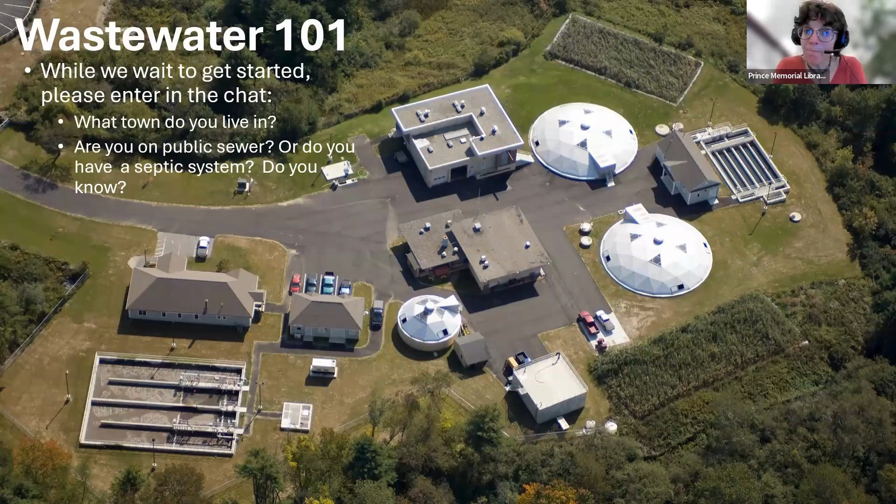And it's my pleasure to introduce to you Dan Marks. He is the Wastewater Superintendent for the town of Falmouth. Prior to working for Falmouth, Dan worked for 12 years as an engineering consultant for wastewater utilities around New England, helping to design and construct wastewater infrastructure around the region.

Dan lives in North Yarmouth with his family, and we just want to make a note here that if you're coming to us from Cumberland, Cumberland's sewered areas are pumped to Falmouth for ultimate treatment as well. So that's an important distinction to make because maybe people in Cumberland are wondering, why are we listening to the Falmouth guy? And that's why.

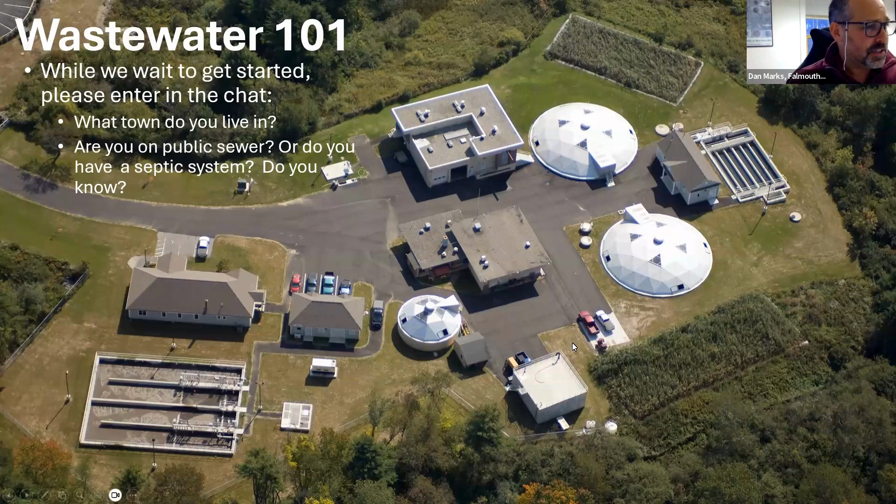As Kelly mentioned, my name is Dan Marks. I am the superintendent of the wastewater department in the town of Falmouth. And as was mentioned, we treat wastewater generated in the sewered portions of Cumberland and Falmouth. And we also receive septage from the unsewered areas of the towns. And I love talking about wastewater. And I know that makes me a little weird.

So I thought I would start by telling you why I wanted to give this talk and hopefully get you excited about it too. Most of us do not think about what happens after we flush or after water goes down the drain. And this is what we call flush it and forget it. This paradigm evolved over many generations and centuries, and for good reason. So I want to start by going way, way back for some context setting.

Before we knew about microscopic pathogens and their presence in our waste, people were getting very sick and dying from all kinds of nasty things. Cholera, dysentery, typhoid. Chamber pots were emptied into the streets and gutters. Enter the toilet. I am biased, but probably one of the greatest public health interventions of the last millennia. Deep pits, and then later on piping networks, separated us from our waste and saved an uncountable number of lives.

This will not be the focus of my talk tonight, but it is worth noting that according to the World Health Organization, over 1.5 billion people still today do not have access to basic safe sanitation services. So our flush it and forget it mentality has evolved over a long history. Yet we are in a new time where this mantra is not serving us anymore. Not the least of which is that the modern toilet literally flushes away clean drinking quality water.

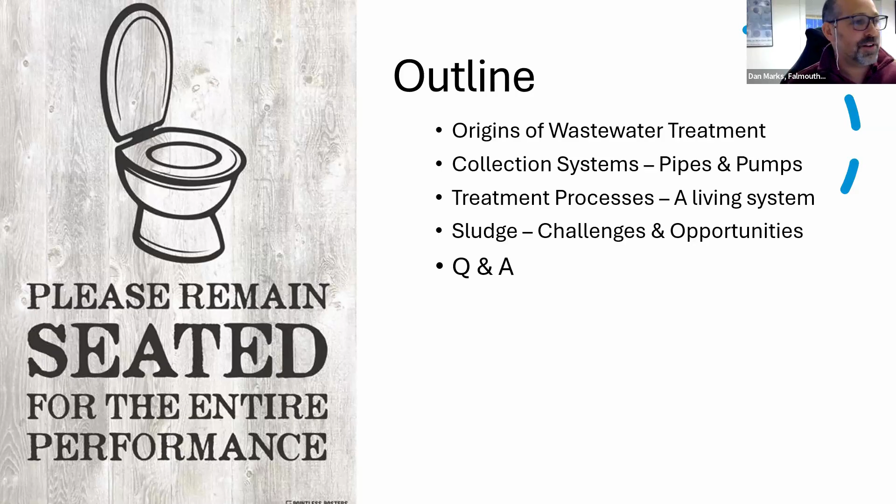So let's get started with a little interaction. I find that everyone has a relationship with wastewater, whether you know it or want to admit it. So no pressure, the stakes are low, but here's a pop quiz. So we can enter into the chat. How many gallons of wastewater do you think the average person produces in a single day? Think about all the water you use that goes down the drain. How much water would you say you use in a day? Type in either A for 25 gallons, B for 40 gallons, C for 50 gallons, or D for 70 gallons.

What do you think is the average? Wow, we're way all over the board here. D plus, I like Pat, okay. I don't know if that's like a good grade or a bad grade. Okay, great. I love the participation here. Give another couple seconds here if anybody else wants to add.

Yeah, okay. Kelly mentioned I come from an engineering background, so designing systems was part of my background. And typical design guidance for a new collection system uses 70 gallons per day per person as a minimum. Some sources suggest even using 80 or even 100 gallons per day per person. So think about how much water that we have to plan for at the treatment plant based on the number of users we have. In Falmouth, our average daily flow at the treatment plant is around 800,000 gallons per day. And between Cumberland and Falmouth, we have around 3,500 sewer connections serving almost 9,000 people. This makes about 90 gallons per person per day in Falmouth.

Collection systems also need to be designed for infiltration. So that 800,000 gallons per day at the treatment plant includes infiltration, which is basically the groundwater and stormwater that enters the sanitary sewer system. Infiltration increases as the system ages, and this is why maintaining the collection system and performing strategic capital improvements is critical. Thank you all for participating in the first pop quiz here.

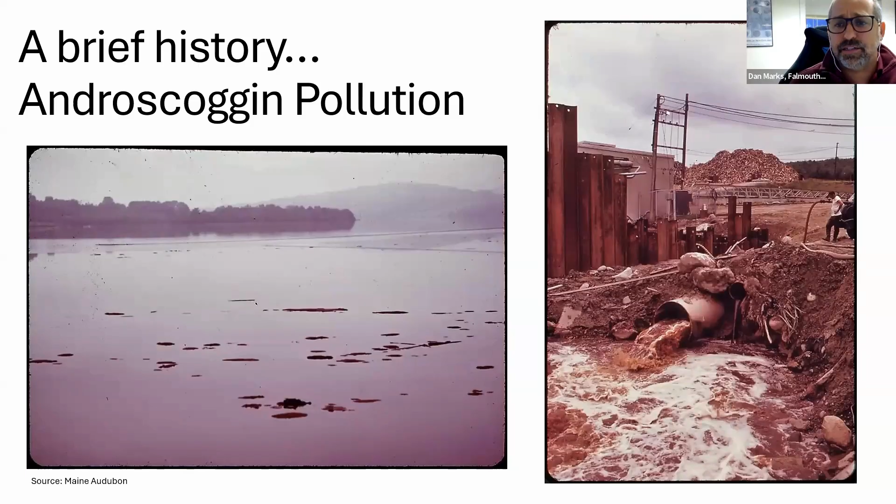Organic pollution fed microscopic life that decomposed, and in doing so, consumed all the dissolved oxygen, leaving nothing left for aquatic life and creating a dead zone. People who remember that time and talk about the Presumpscot River talk about the river being a caramel color with huge amounts of foam and smelling horrible.

So enter Edmund Muskie, who spearheaded drafting the passage of the Clean Water Act. He's famously from Rumford on the Androscoggin. The first Federal Water Pollution Control Act was written in 1948, but it took its current form in 1972 with amendments that came to be known as the Clean Water Act. So what changed with the Clean Water Act?

First, lots of money from the federal government, up to 90 cents on the dollar funded from federal grants to build infrastructure, piping networks, and treatment plants. So that's the 50 years ago, and most of this infrastructure is now 50-plus years old. In Falmouth, sewers under the streets drained directly into the ocean.

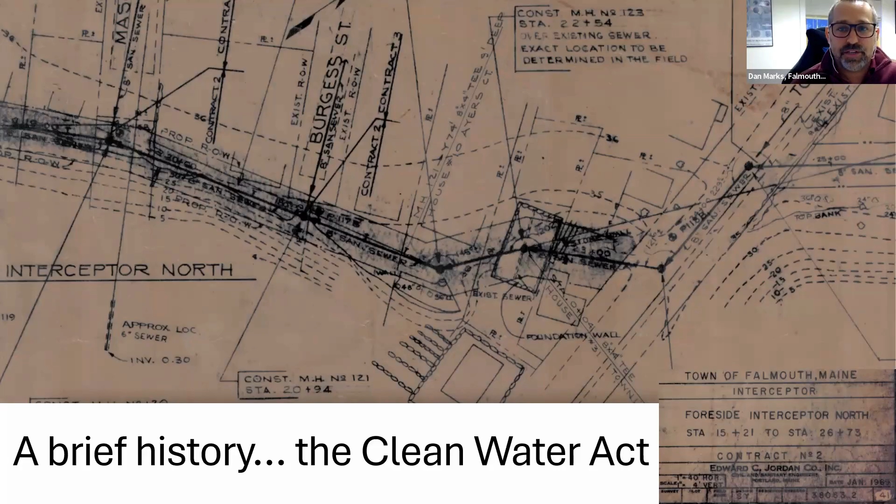We measure organic matter in terms of biological oxygen demand. So what is BOD? It's an important parameter in wastewater systems. It is a measure of the organic strength of the wastewater and was one of the primary pollutants that the Clean Water Act regulated. We measure it as oxygen demand because as bacteria consume organic waste, they also consume oxygen. BOD is a measure of how much oxygen is needed for the bacteria to metabolize the waste that we're feeding them.

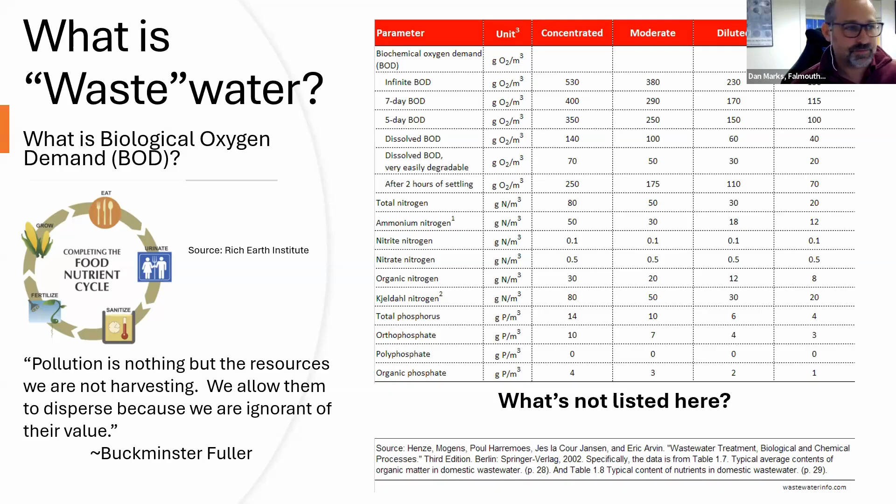So Cumberland has almost 1,300 sewered connections, 25 miles of sewer in the town, 13 pump stations, and 8 miles of pressurized force main coming from these pump stations. The system is owned by the town, but under contract, it is operated by the Portland Water District.

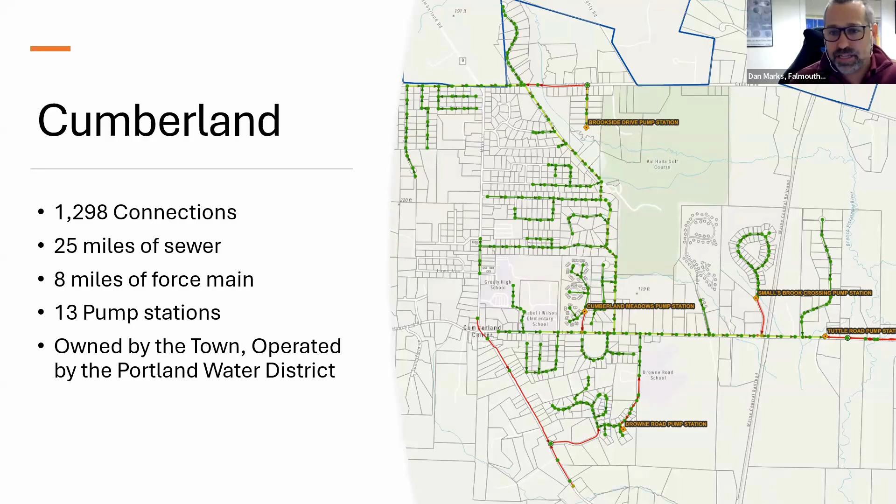There's a short section of sewer down Main Street south of Tuttle Road, including a library that happens to be in that location. Also Drowne Road, and all of that flow drains to Tuttle Road and then is pumped east on Tuttle Road. Here's another series of maps.

I don't know if you can all see my mouse, but here's the Tuttle Road force main comes across, hits Middle Road and goes north on Middle Road. And then it goes under the highway, under I-295 at the end of Greely Road. The northern extent of the Cumberland collection system is on Ferne Lane.

There's also a pump station on Ledge Road, picks up the Thomas Drive neighborhood across from the Chebeague parking lot. All that drains to a pump station on Powell Road, which is pumped up to the height of the land on Route 88. And then from Route 88, it drains by gravity down Route 88 to the Foreside Road pump station.

I'm showing this map split in half. The left side is north and the right side is south. And then into Falmouth on Route 88. On Route 1, we pick up the new units on Casco Bay Drive, neighborhoods on Granite Ridge and Falcon Drive, and then into Falmouth on Route 1. So all of the sewered areas of Cumberland drain either down Route 1 or Route 88 and enter into Falmouth in one of those two locations.

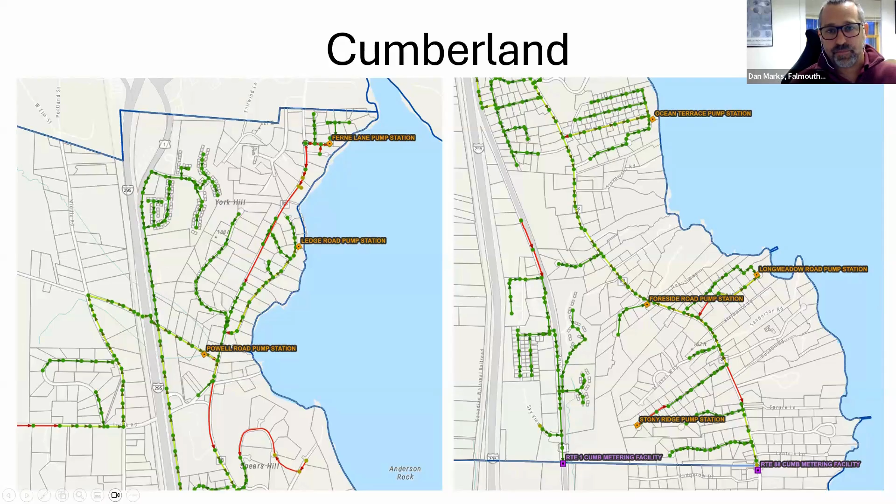In Falmouth, we have almost 2,200 sewered connections. We have 44 miles of sewer. We have 33 pump stations and 14 miles of pressurized force mains coming from those 33 pump stations. The sewer system in Falmouth is also owned by the town, but it's also operated by the town. That's the department that I am a part of. We operate the Falmouth collection system and treatment facility.

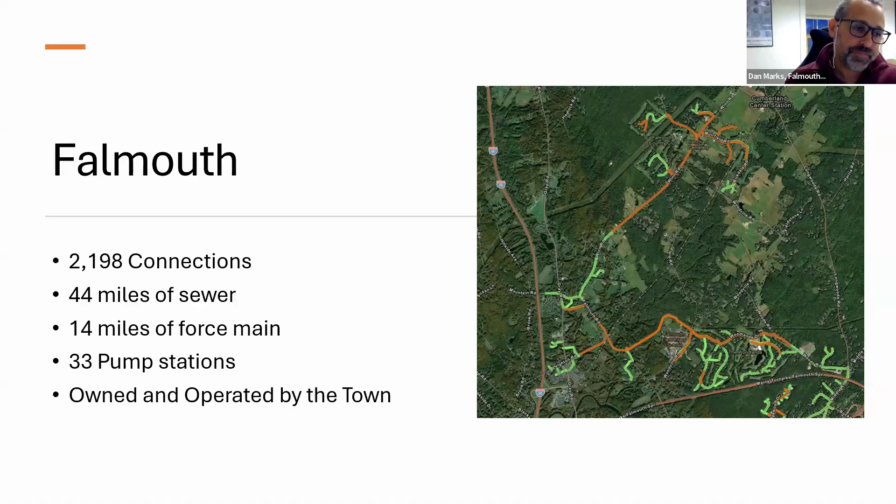The Falmouth collection system actually also starts in Cumberland. There's a small section just over the line on Winn Road in the Falmouth Country Club area. So we collect sewer from all of Falmouth Country Club on Winn Road, goes down Winn Road, portions of Route 100, Exit 10 area, Leighton Road, and all that is pumped on Falmouth Road up behind the high school in Falmouth, through the Woodlands, and all of the Woodlands neighborhood is on sewer as well.

From the Woodlands area, it flows down Woods Road to Middle Road and then south, picking up some of the side streets there. The southern part of Middle Road, which is Route 9, our southern extent is in the Pleasant Hill area. That is pumped up to Lunt Road, and all of the sewer from the west side of 295 goes under the highway on Lunt Road.

We have a pump station on Lunt Road that pumps to the treatment plant. East Falmouth, basically all of Route 1 and the Route 88 corridors and the side streets are sewered. The main interceptors were built as part of the Clean Water Act. The street sewers that exist on some of the side streets that dumped into the ocean and some of the other water bodies predated the Clean Water Act.

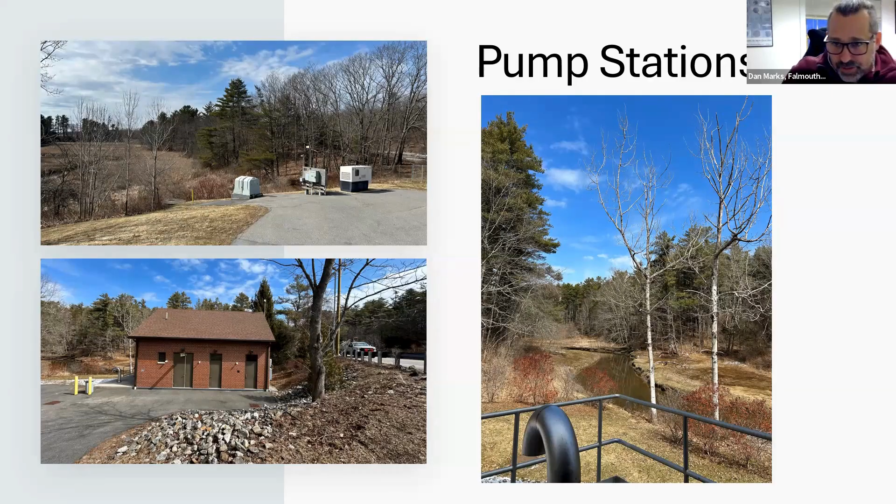And below that and on the right is our largest pump station at Mill Creek on Route 88. All of Cumberland's flow goes through the Mill Creek pump station. The upper level, which you can see the outside of it on the bottom left, houses our power and control panels, motor drives, and a generator. But let me briefly take you inside this pump station. 3 stories below the surface, it is a concrete bunker.

There are 4 electric pumps there, and at least one of which is always running. There are 2 30 horsepower pumps in the middle for normal dry weather flows and 2 60 horsepower pumps for wet weather flows. The wet well is just on the other side of this wall here, if you can see my mouse, that's where all the water from Cumberland and the Foreside Road in Falmouth collects. And then the pumps are piped through that wall and then discharge up through the ceiling and underground to the treatment plant.

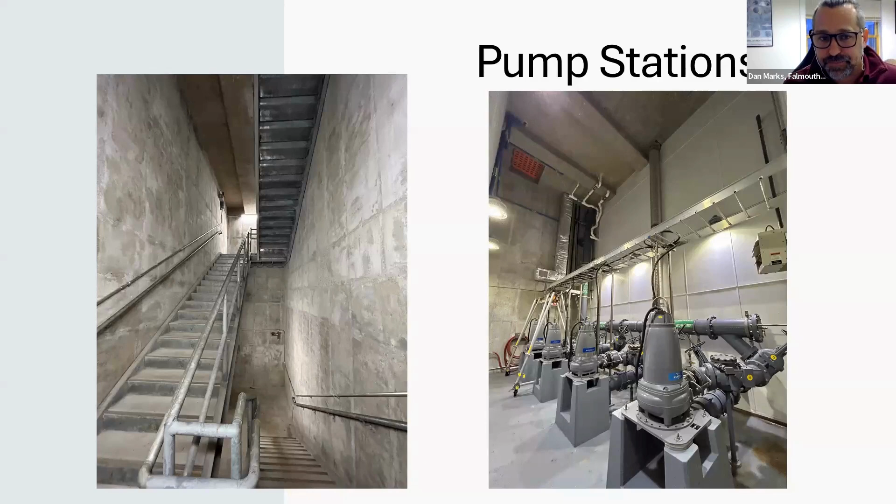This is an extensive network of piping and mechanical equipment and requires everyday maintenance and review. But on top of that, we have a number of issues that are presenting themselves. As I mentioned, the age of the infrastructure. Much of our infrastructure is 50 years old. And inevitably, when we experience failures, it has to be during a holiday weekend. The picture on the left is of my 8-year-old running a construction site. Not really, but it was over the Christmas holiday, so he came with me.

But in the trench section behind him is a section of asbestos cement pipe that was installed probably in the 1950s. Asbestos cement pipe, or what we call AC pipe, is particularly sensitive to the sewer gases that can build up in long piping networks. This AC pipe collapsed, it flooded someone's basement, and required over $100,000 in emergency repairs. So, Happy New Year.

The picture in the middle is a manhole below Shoreline Drive in Falmouth, where we have another interceptor that runs below the beach. And the picture on the far right is our Underwood pump station, located near the old Underwood Spring below Foreside Road. You can imagine how these and related pieces of infrastructure are impacted by climate change pressures, including sea level rise and storm surges.

The age of the infrastructure and climate change increase the infiltration and inflow, basically the leakiness of our system. And we are constantly battling that infiltration to maintain capacity at the treatment plant. Our discharge license, again, that came from the Clean Water Act, specifies that our average daily flow allowable is 1.5 million gallons per day. Ideally, all of that flow would be dirty sewer water that we can treat. But every gallon of relatively clean stormwater or groundwater that enters the system takes the place of a dirtier gallon that we could otherwise treat.

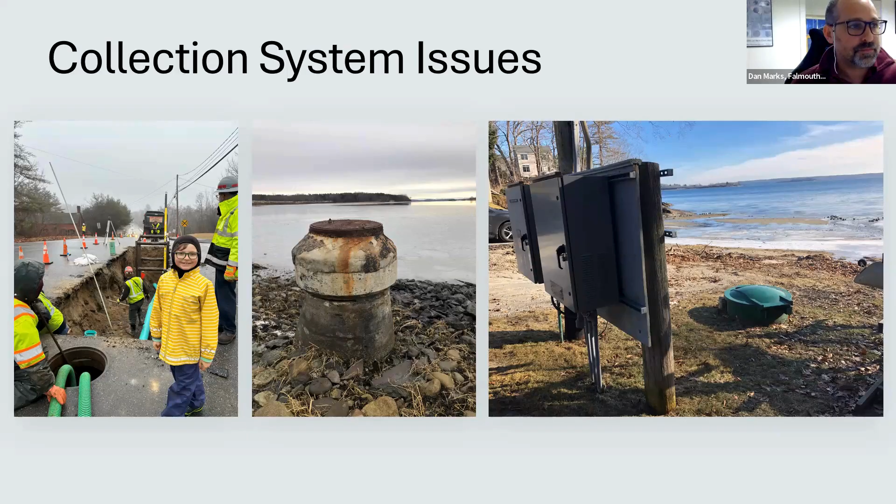Okay. All that to get us to the treatment plant. So we finally get to the wastewater treatment facility. The Falmouth Wastewater Treatment Facility is located on Clearwater Drive, behind the Walmart and near the University of Maine Cooperative Extension. The treatment plant can be thought of as a series of barriers between the waste we produce and nature.

Wastewater treatment combines biological, physical, and chemical processes. We are modeled after nature, utilizing microbial communities to consume contamination. We do what nature does, except that we speed it up using vast amounts of energy so that it can be located in a smaller footprint. You'll hear me say this a couple times tonight.

We are farmers, and microbes are our herd. And just like a farmer, we have to keep what we are growing happy. Our microbes must have everything they need to thrive: food, oxygen, and nutrients. But before we get into that, let's step through the treatment process.

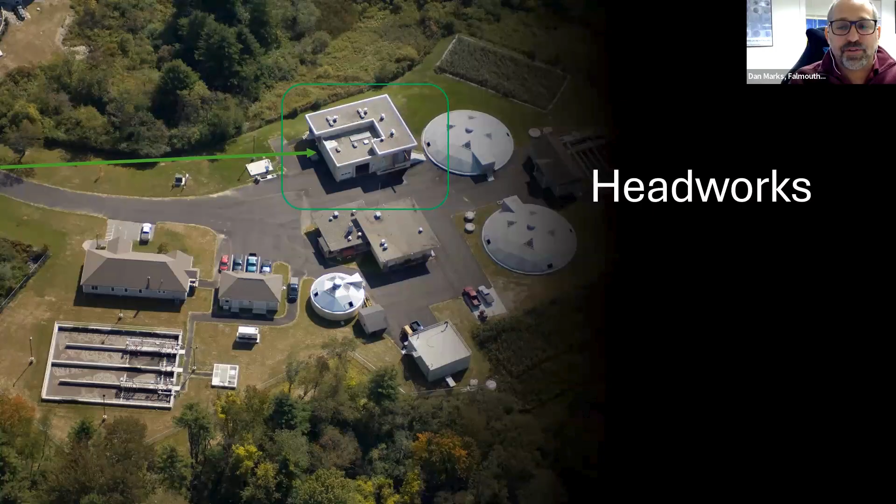The first stop is the headworks, where all of the influent from our collection system comes. So here's the headworks. In the headworks, we use physical processes to remove things that cannot be treated through the biological process. This is our first set of barriers between our waste and nature.

And inside the gray compartment in front of it is a long screw. It's about 30 feet long. It goes down about 20 feet deep into this tank and pulls the grit that drops out of the water column up in a screw and dumps it into a dumpster.

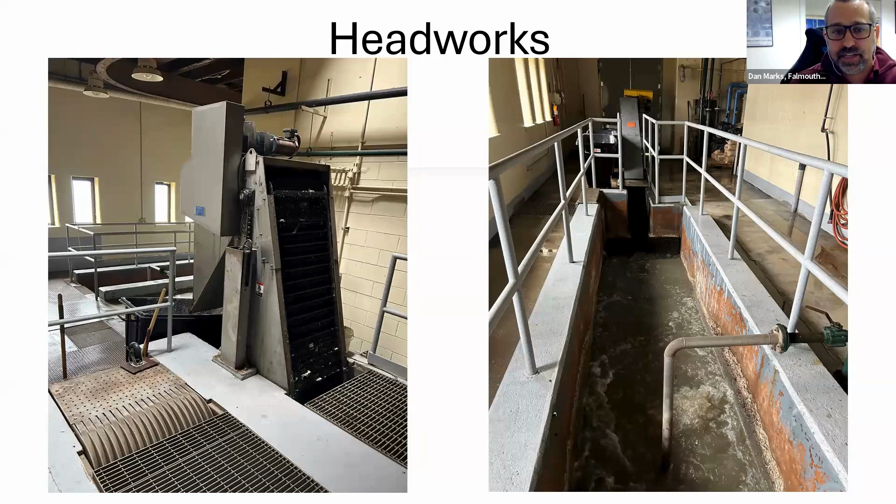The grit can prematurely damage our mechanical equipment further downstream, so we try to get rid of it. We truck both the screenings from the bar screen and the grit to the landfill at Eco Maine. Once this insoluble inorganic waste is removed, we are ready for the next step: biological treatment.

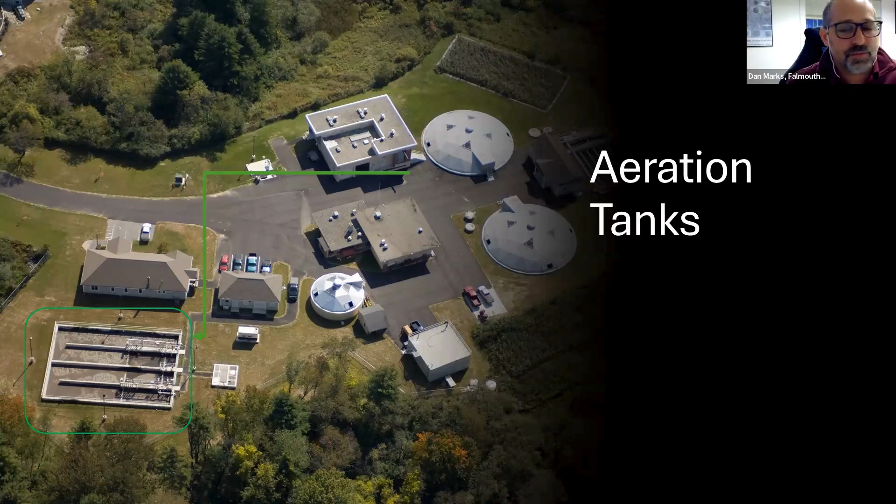So from the headworks, water is piped to the aeration tanks. The aeration tanks are the biological heart of the treatment plant. What does this mean? Simply put, we are using bacteria to consume organic matter. In a natural environment, like a river, microbes do the same thing.

At the plant, we try to optimize the environment to select for certain bacteria that efficiently consume organic matter. Bacteria and organic-rich water are mixed in an aeration basin and provided with dissolved oxygen to stimulate the decomposition of organic materials through biological oxidation.

One of the primary ways we do this is to supply oxygen. You'll notice the aerated zones with the bubbles. So we aerate that water column to a certain dissolved oxygen level, about 2 parts per million.

In addition to air, our microbes need the right amount of food to support the population. So a critical parameter for us is the food to mass ratio. We maintain the right population or mass of microbes to treat the organic waste that's coming to us, the food.

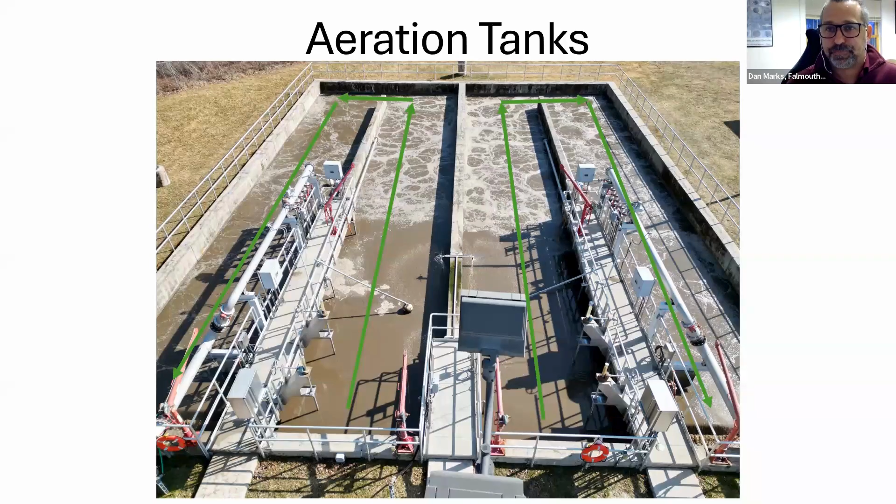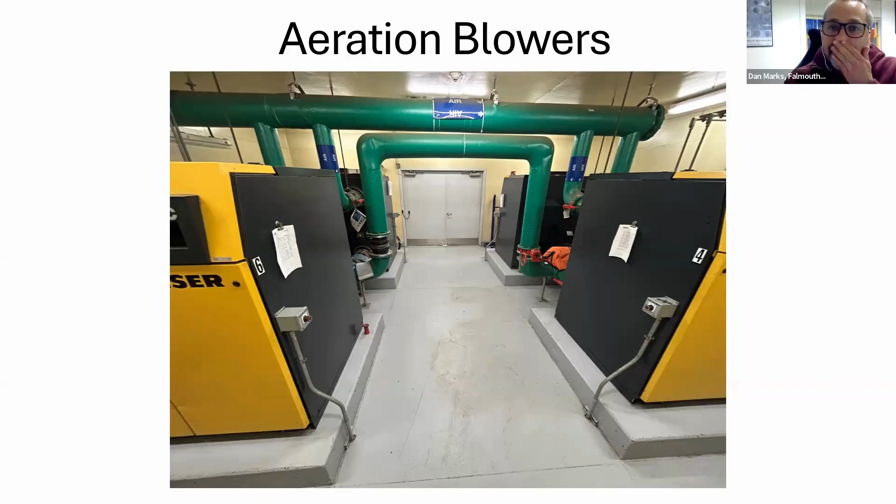Just as a side note, since we were just talking about the pump stations and collection system, the 33 pump stations we have in town average around another $10,000 per month. So we are spending a lot of energy. But at the treatment plant, these blowers providing air to the biological process are the largest single consumer.

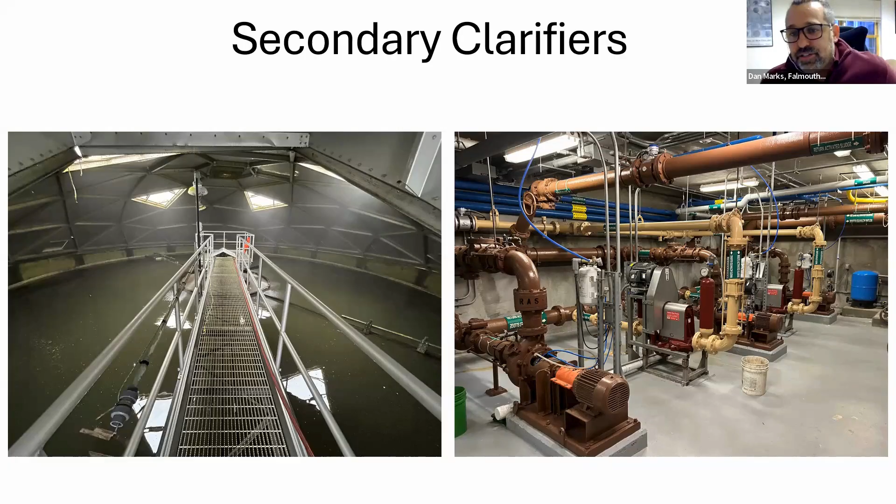Clarification is a physical process of settling. We quiet the flow and allow the biological flocs of microorganisms to settle to the bottom. Using the pumps shown on the right, we remove the settled sludge from the bottom of the clarifiers. Most of that flow, now called return activated sludge, is returned to the aeration tank to optimize the food to mass ratio.

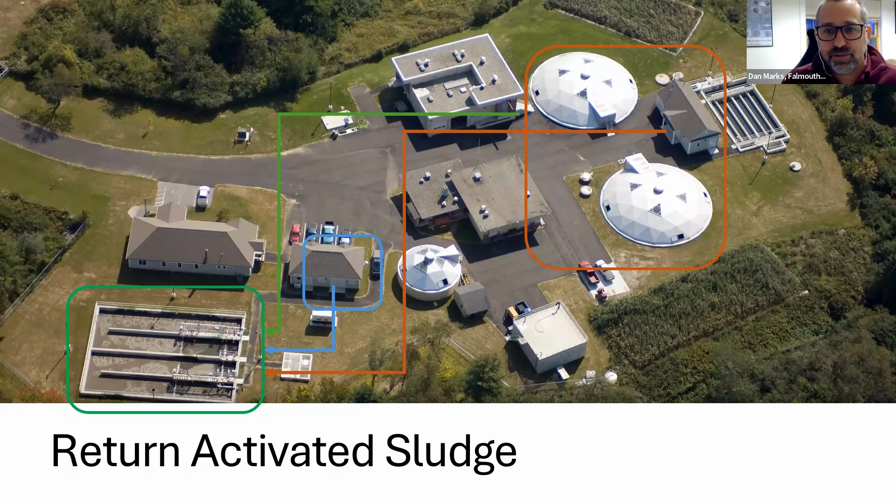So we've started to complicate our picture a little bit. We have the raw influent from the headworks in green, and now the return activated sludge from the bottom of the clarifiers in orange. We have the air from the blowers in blue. We modify how much sludge we return to get the right amount of microbes to eat the incoming waste, and we give them the oxygen they need to consume that waste. As the microbes consume organic waste, the aeration tank is another barrier between the waste we produce and the environment.

Nitrogen is the limiting nutrient for growth of plankton and algae in marine systems. You may also see that phosphorus is a limiting nutrient for growth in freshwater systems. Excess nitrogen causes plankton and algae to bloom. And as this organic matter decays, the bacteria doing that work to decompose the organic matter use up all the oxygen in the water column, leaving no oxygen for other aquatic life. This is called eutrophication. So how can we help maintain the nutrient balance in the environment downstream of our wastewater treatment plants?

To understand this, let's take a quick look at the nitrogen cycle in nature. About 80% of our atmosphere is nitrogen gas. There are bacteria in the soil, nitrogen-fixing bacteria, that convert the nitrogen gas, or fix it, to ammonia, or NH3. Then there are nitrifying bacteria that convert the ammonia to nitrate, and denitrifying bacteria that convert the nitrate to nitrogen gas back into the atmosphere. Meanwhile, that nitrogen in the soil is used for soil health, for the bacteria, for the life under the ground.

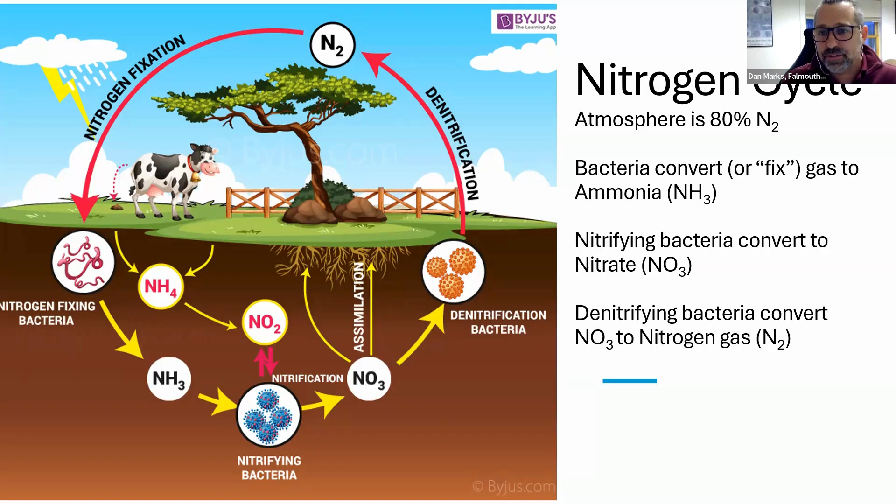So how do we use the nitrogen cycle at the wastewater treatment plant? I mentioned early on that the water environment has a nutrient balance that we work to maintain. In wastewater, most of the nitrogen is organic nitrogen. It's mostly urea from our urine. And in the collection system, urea is converted to ammonia. So in the aquatic environment of wastewater treatment, we start with ammonia, or NH3.

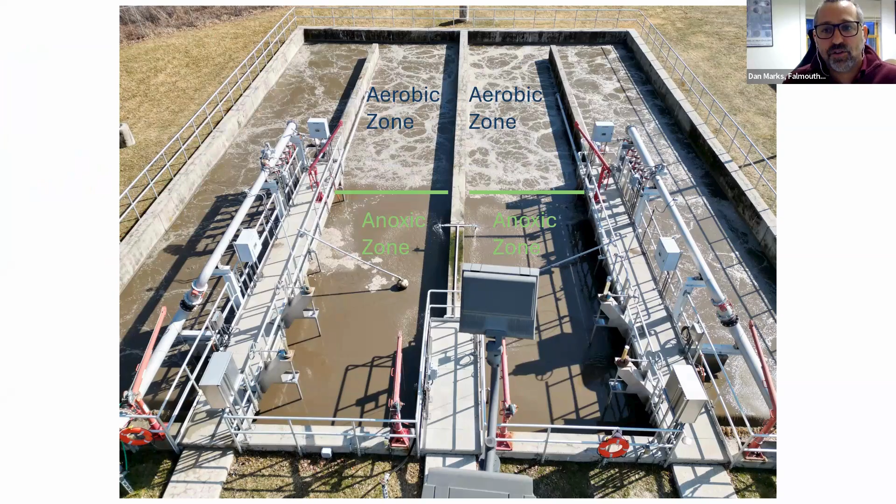So let's go back to our aeration tank. Denitrification occurs in a low or no oxygen environment, what we call the anoxic zone. In the anoxic zone, nitrate acts like oxygen in microbial metabolism. Nitrification, on the other hand, is strictly aerobic, or with oxygen. But before we can have nitrate to denitrify, we have to create nitrate through nitrification.

To do this, we have an internal recycle that pumps around 3 times the forward flow of the plant back through the treatment process. So just for rough numbers, if our flow at the treatment plant is 1 million gallons per day, that internal recycle, the big green arrow, may be pushing 3 million gallons a day of flow. So what's racing around in each of those tanks is actually 4 million gallons per day on a flow rate.

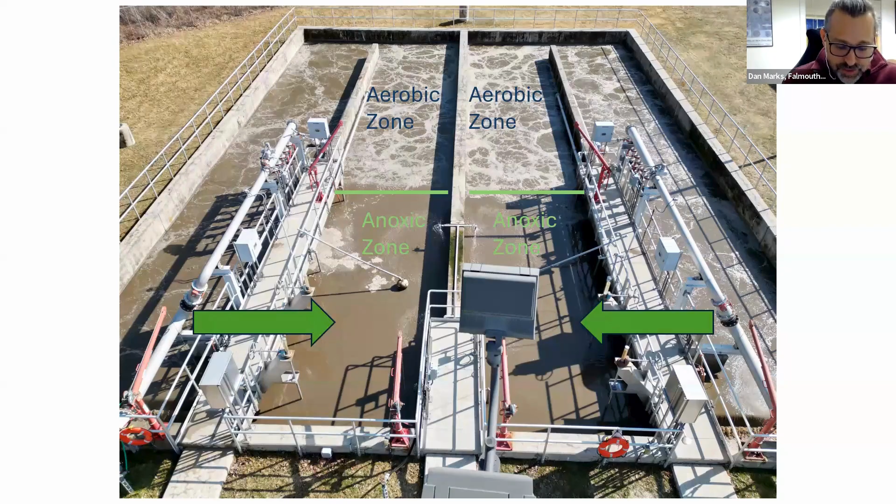What this allows us to do is get the nitrate-rich water that has been generated by nitrifying bacteria during the aerobic decomposition of the organic matter, combining that with the organic-rich influent water that's coming from the headworks. This feeds the denitrifying bacteria that prefer a low oxygen environment, where nitrate, instead of oxygen, is used as the terminal electron acceptor in the microbial metabolism. The result is that we off-gas nitrogen, N2, back into the atmosphere. So nitrogen removal in our aeration tanks is another barrier between our waste and nature. And as I mentioned, we're farmers, we're microbe farmers.

Can you all still see my screen?

Yes. Okay, sorry, something changed with mine. No, you're good. Okay. Let's see, Zoom slideshow. Sorry, let me get back here to my piece. Okay.

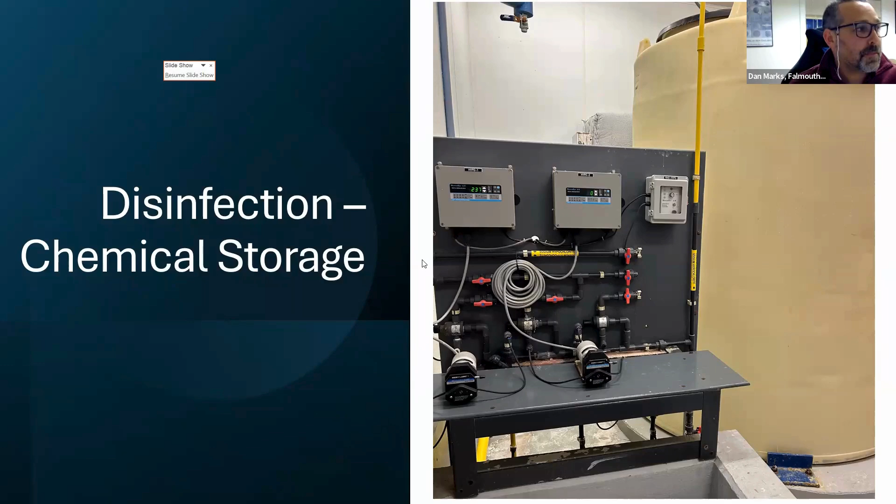So I was saying we can't discharge chlorine-rich water into the environment without killing the natural microbial life. So we neutralize the residual chlorine with sodium bisulfite. Both chemicals are metered into the clarifier effluent based on flow rate and residual chlorine. Okay, great.

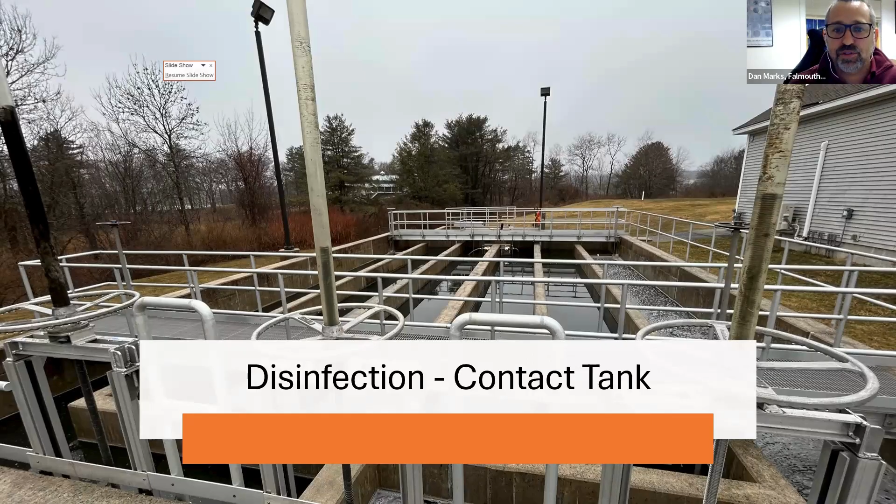Chlorine needs time mixed with the water to make sure that pathogens are killed. We do this in the serpentine tank that ensures the chlorine has sufficient contact with the water. We measure chlorine residual at the head end of the tank to make sure we are putting enough chlorine in. We measure residual at the end of the tank to make sure all of the chlorine has been removed before we release it back to the environment.

All of the clean water from the treatment plant is discharged into the tidal estuary of the Presumpscot River. This means that water that was sent down the drain on Greeley Road in Cumberland has traveled almost 11 miles underground in pipes before it is finally discharged back into the environment. On average, we remove around 98% of the organic matter in the water, as measured by BOD, and 98% of the total suspended solids. And we achieve on average 80% removal of nitrogen.

Another quick note on chemical pollution. Following the Clean Water Act, as I mentioned, our wastewater treatment plants were primarily designed to treat for organic waste, as measured by BOD, and total suspended solids. And as I mentioned, we do a very good job at doing that. Some plants treat for heavy metals if needed based on the users in the collection system. But more recently, plants have been upgraded to treat for nutrients such as nitrogen and phosphorus. What I hope is clear is that today's wastewater treatment plants were not designed to treat for PFAS, pharmaceutical residuals, or many of the contaminants of emerging concern.

Part of the opportunity of wastewater treatment for better public health and the environment in the future is based on the fact that we have a collection system that goes to everyone's home and literally takes your waste away. So even though we are diluting our waste by adding clean water to it, we are centralizing your waste by collecting it at the treatment plant. Because the wastewater treatment plant is a barrier between the pollution we create and the environment, we can bolster that barrier by adding new processes that treat the contaminants of our modern consumption lifestyle. This comes at a cost, however, that must be balanced with the costs of maintaining our existing infrastructure and everything else in life.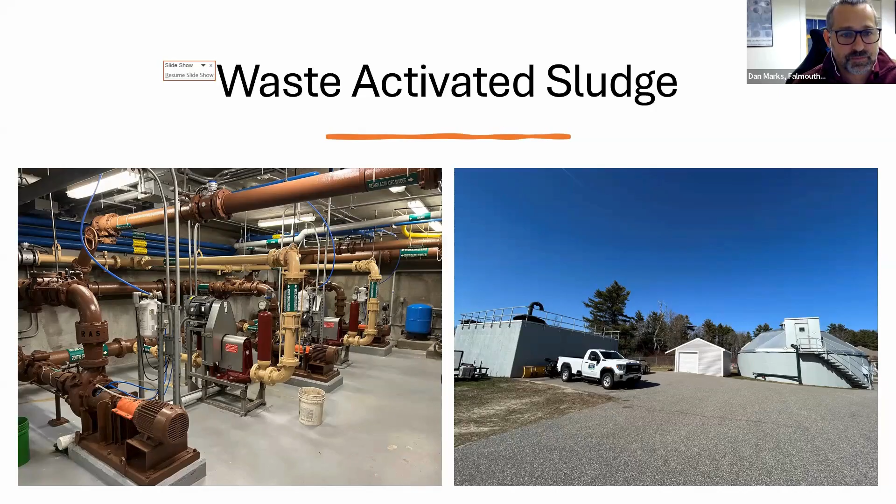On the left, here are the pumps from before that pull the sludge out from the bottom of the clarifiers. As we saw, some of that sludge is returned to the aeration tanks, and some is wasted, which is pumped to these two tanks shown on the right. And here's our aerial view again, showing how those pipes go. We must waste sludge to prevent the biological overload of the secondary treatment process and subsequent loss of solids through the plant discharge. In other words, if we didn't waste sludge, the sheer mass of bacteria that we're growing and holding at the treatment plant would be washed out and would end up in the environment.

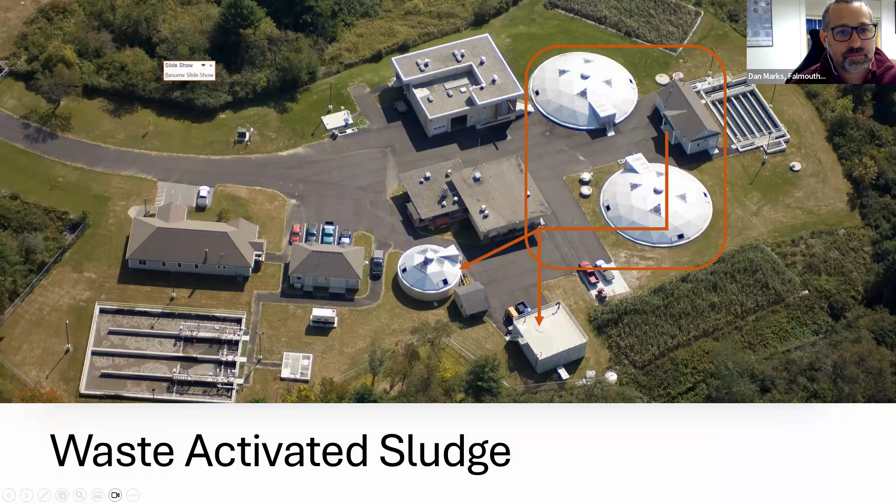Sludge is pumped into the storage tanks at around 1 to 1.5% solids. Think of very thick coffee as a consistency. In the storage tanks, biological activity increases the solids content slightly through digestion of volatile solids. However, this is still very much a liquid. Therefore, the final step of the sludge journey at the treatment plant is dewatering, which is shown in the aerial photo here.

We use conveyors to load the sludge into the dumpster. In Falmouth, we load a little more than one dumpster each week. And over the course of the year, we produce about 800 tons of sludge. So now that our sludge is in a dumpster, what do we do with it?

I have a couple more slides on sludge disposal, but I want to check in. I see that there's a couple things in the chat. I have 15 more minutes. I could run through sludge disposal pretty quickly. Let me see what's in the chat. I'm having some issues with the Zoom here, Kelly. I'm not sure if you can tell me what's in the chat. The chat is just saying you're doing great, Dan. Oh, we do have one. We have one question here.

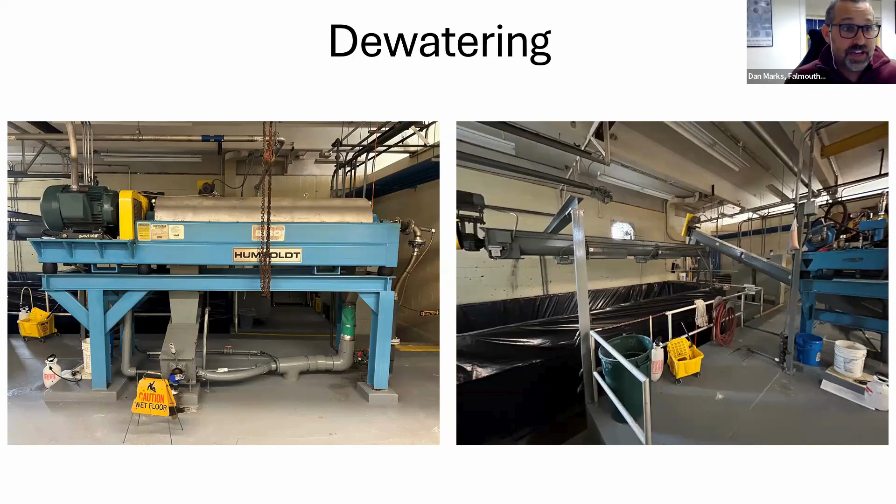Any chance of installing solar panels at the treatment plant? That's a great question. We do have some land. Let me go back here. You can see from this aerial photo, we do have quite a bit of land. We are in the shoreland zone, so we're somewhat limited from a permitting perspective. The site may look like it has a lot of open space, but as you can imagine from the arrows and pipes I've shown flowing from one building to the next, there's a lot going on underground. So we can't put stuff over it, but we have a lot of flat building roof, and we do have areas where there's no piping or anything else that would get in the way.

This is common for wastewater treatment facilities: we're the largest energy consumers in the town. That's common in most municipalities where there are wastewater treatment facilities. So it would make sense to produce electricity where we're consuming it. It is something that we're talking about at the town. You probably are aware that the town has recently installed a solar array on the old municipal landfill on Woods Road. That does offset some of our electrical costs. But there's more to be done there. We're looking into it. It's an opportunity for sure.

Okay, so people are at the edge of their seats. They want to know what happens to the sludge. And somebody's asking about ecomaine's incinerators that cannot destroy PFAS, so what do they do with the sludge? Great. I will definitely get into that a little bit. I have a couple slides on PFAS, one slide on PFAS destruction, some promising technologies.

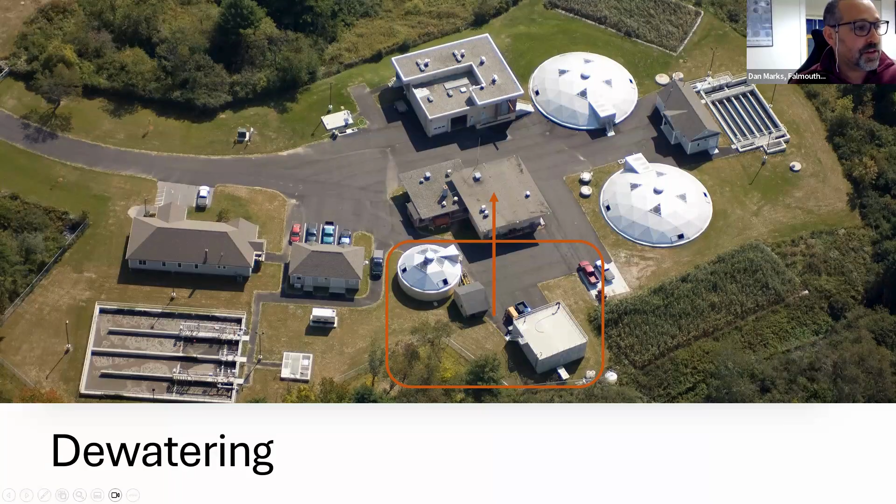Just to clarify, we do not send our sludge to ecomaine. We send the inorganic material from the Headworks building to ecomaine. That's our grit, like the sand and gravel, and insoluble materials like plastics. Not microplastics that make it through the screen, but the bar screen at Headworks takes out plastic bags and larger plastic things that you might imagine are in the sewer system. That's what we send to ecomaine. So let me go on. I'll go through these next couple slides and we'll save some time for questions about sludge disposal. Okay.

So what do we do with the sludge after we dewater it? Prior to the discovery of contaminated milk on a farm in southern Maine, which many of you may have heard about, and going back to the 1970s, most sludge was, quote unquote, beneficially reused by land application. This solved our sludge problem and was a source of cheap fertilizer for farmers. Beneficial reuse was promoted by the US EPA and the Maine DEP. In 2022, Maine led the nation by banning the land application of sludge due to the presence of PFAS.

Some other states have followed suit, but really the whole nation is watching what we do in Maine on this issue. For those that don't know, let me just quickly say, what is PFAS? It's per- and polyfluoroalkyl substances. They're used in various consumer products for their water, stain and grease resistant properties. Think Gore-Tex jackets or Teflon and other nonstick cookware coatings, stain-resistant furniture and carpets. It's also in many cosmetics, clothing and shoes, soaps and waxes, contact lenses. The list is very long.

It's a family of thousands of chemicals, and the common element is that they have a carbon-fluorine bond backbone that is known to be one of the strongest bonds that can be made in chemistry. Thus, they have been called forever chemicals. They were first introduced in the 1940s. They have been found in polar bears in the Arctic and rainwater. PFAS are ubiquitous, and they are also in sludge.

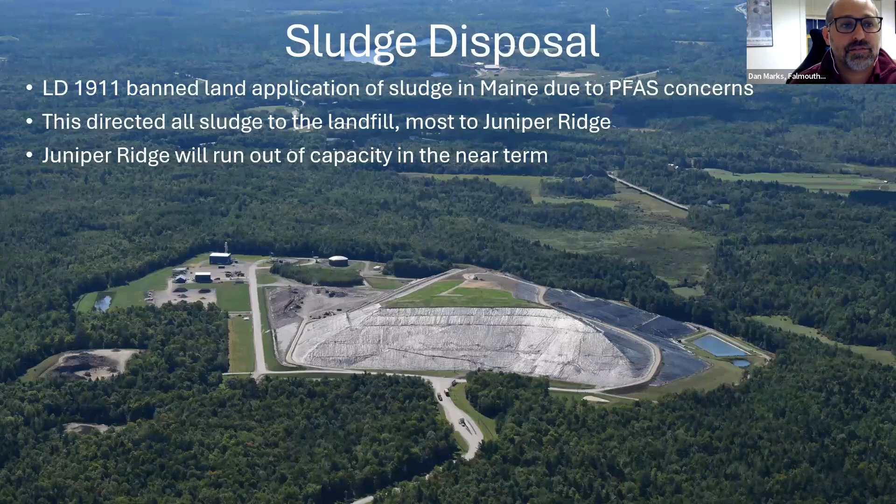It's further exacerbated by the fact that the landfill has a finite capacity. That's the source of much debate, and there's a lot of politics behind that. I'm happy to talk about that more, but I'll continue on here for now just to get through the slides.

This is because organic material in a landfill creates methane. Carbon put back onto the soil and properly managed will stay in the soil. Of course, that was why it was deemed a fertilizer, that and the nutrient value, why it was deemed a fertilizer by farmers and EPA before we had the concern over contamination.

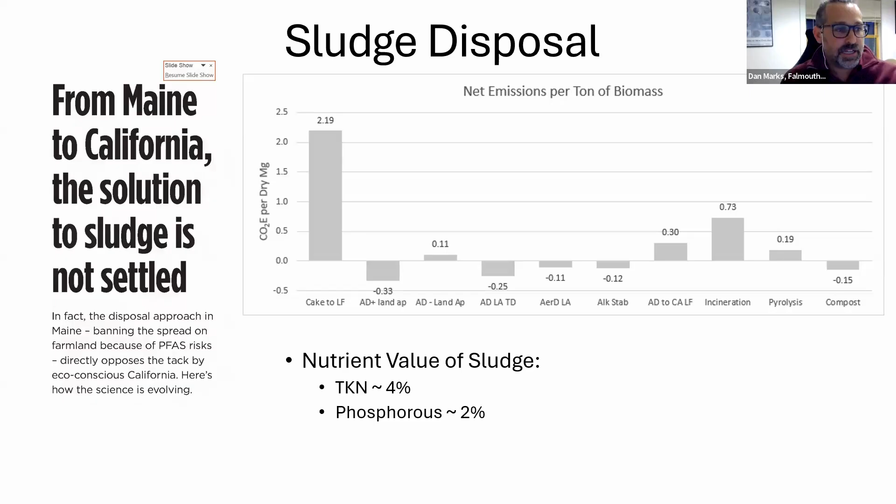Oh, I need to share my slide again. I had some issue with the presentation here. Okay, great.

With both of these technologies, the promise is that the very strong carbon-fluorine bond will be broken. And in doing so, the other contaminants in the material will be reduced to their elemental state. If we are doing that with PFAS, because it's such a strong bond, then we are also breaking the bonds of other chemicals, such as contaminants of emerging concern.

This is all unproven at this point, and I should mention that the technologies are not at industrial scale readiness. Some of them are being piloted, but they're not ready for mass deployment. And as you may imagine, all of this stuff is very, very expensive.

So we need to come to some consensus, and this is one of the reasons for me wanting to do this talk, that this is a priority. The science is evolving on this. The toxicity of PFAS is something that we're still understanding more and more.

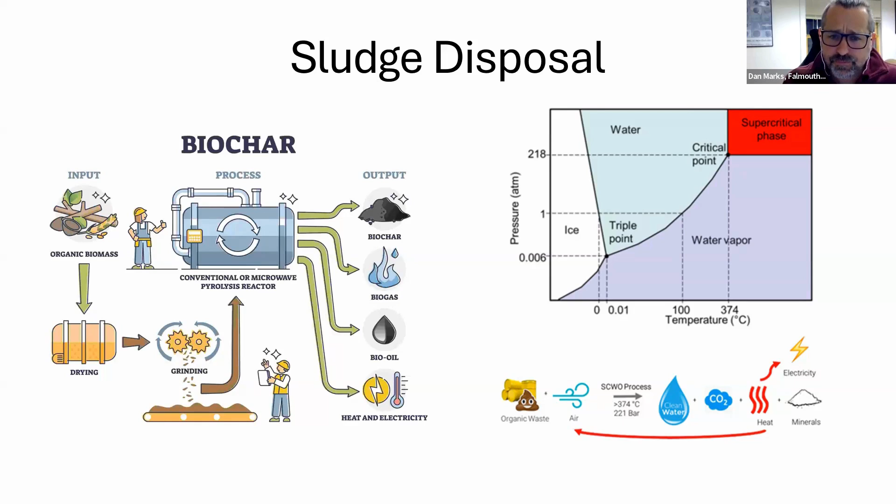But the protection of the environment and our food sources will require that the future of wastewater treatment deal with the contamination inherent in our modern lives, unless we significantly reduce our consumption of the many goods that contain these chemicals. The wastewater treatment plant always has been a barrier between the waste we produce and the environment, and we can continue to play this role.

So the costs of sludge disposal, including treatment for PFAS and other contamination, have to be taken in addition to the cost to maintain our infrastructure, the needed investments that we talked about earlier due to the age of infrastructure and climate change risks. We have a lot of work to do in the next 10 years, specifically in Falmouth and Cumberland, but in the wastewater treatment industry as a whole.

Okay, let me see if... So I can feed you a question if you'd like. Sure, that would be helpful. I can see the chat too. Yep. Okay. Go ahead.

When we see big clay pipe runoff from higher up discharging into the ocean, is that untreated, like Town Landing in Falmouth or Wildwood/Broad Cove in Cumberland?